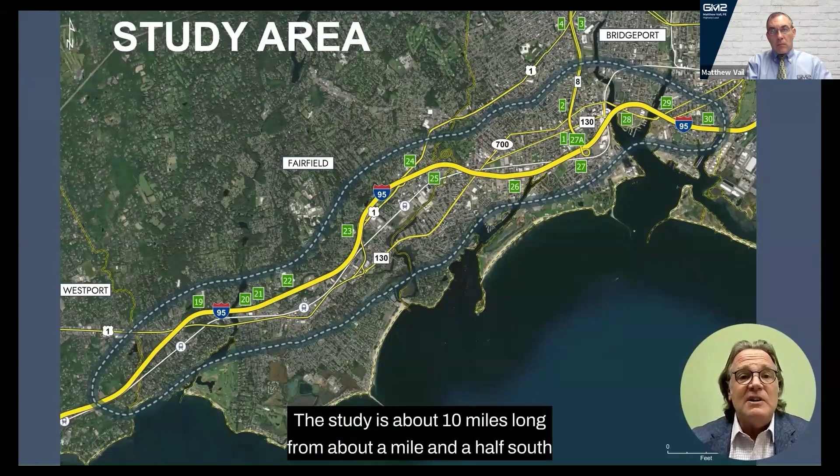The study is about 10 miles long, from about 1.5 miles south of exit 19 near Sasco Creek Road to just north of exit 30 near the Bridgeport-Stratford city lines. It also includes adjacent state roads such as routes 1, 8, and 130.

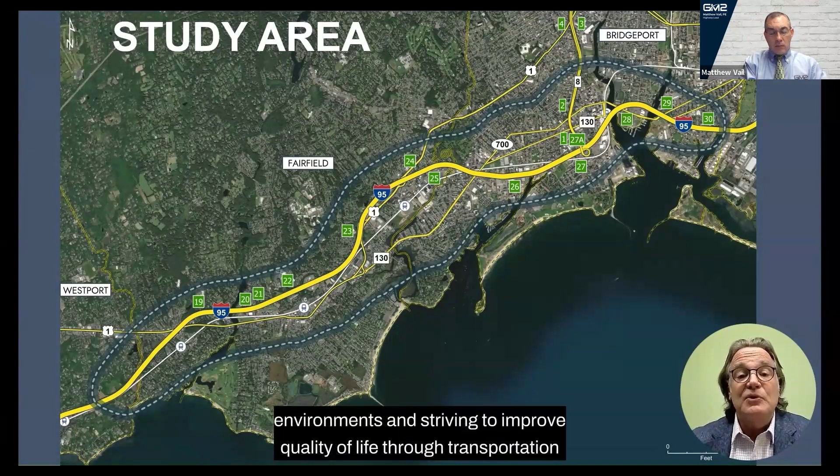The intent is to look at the transportation issues in the corridor along with sensitive resources and recommend solutions to address the transportation needs while reducing impacts to the human and natural environments and striving to improve quality of life through transportation solutions for all community members within the corridor.

Keep in mind, this is just a study as of now, and no specific project has been identified. The I-95 mobility study is called a PEL study. PEL stands for Planning and Environment Linkages and is a federal highways term for this very high-level study. A PEL study is intended to link the bigger regional planning efforts to more project-specific environmental studies.

A PEL is reliant upon input from the community. The linking of this community input with the larger regional planning and environmental issues creates better real-world collaborative solutions to transportation needs in the area. At the end of the PEL, ConnDOT will produce a comprehensive report that summarizes the PEL and provides recommended solutions for the transportation needs in the corridor.

The PEL study process follows these steps. There's an identification of transportation issues and a prioritization of those issues. Next, along with community input, a vision is developed for implementing improvements in the study area. Areas of environmental and community concern are highlighted and studied at a very broad level to understand constraints that need to be considered in developing solutions to the identified transportation issues.

After the development of real-world solutions and any associated mitigative strategies, a roadmap is developed to dovetail the PEL information into a more detailed project-level environmental study. Only then can projects be identified and recommended for implementation, both short and long-term.

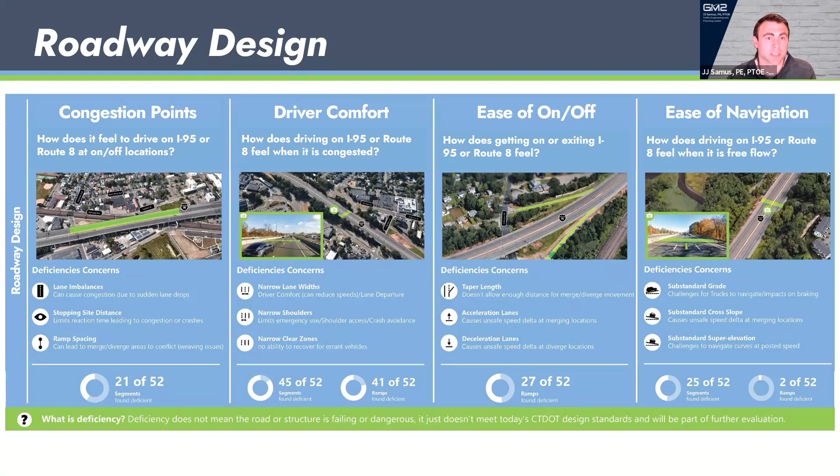We look at these through the lens of what is deemed a design standard. So when something doesn't meet today's standards, we deem it deficient. It's really important to identify that deficient does not mean unsafe—it just means it's something we need to examine. A lot of these facilities are very old, and part of the study is identifying those locations and, through our alternatives development, bringing them up to standards to function correctly today. We can see there are several areas of improvement along the main line that we can fix from a design perspective. Go ahead and go to the next slide.

And we look at structures in general. The bridges and structures along the corridor meet those standards developed and provided by CTDOT, with a few bridges needing to be reviewed, but these will all be part of what we're trying to address during this project.

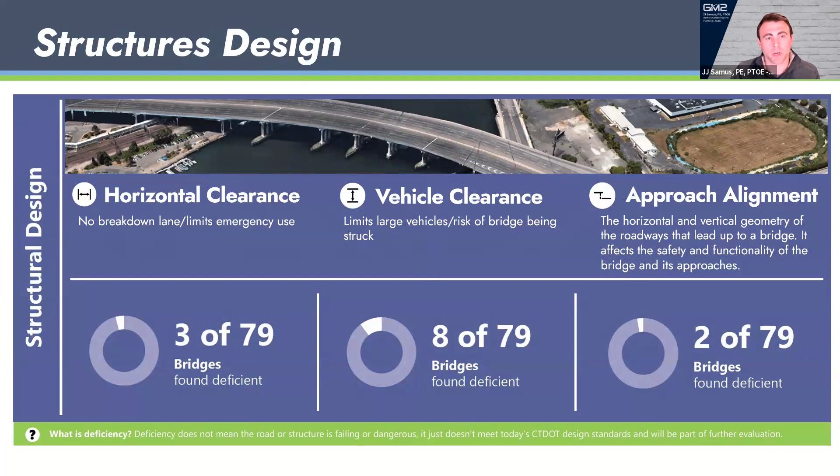Raul, did you want to take over for a sec? Is there anybody we need to address? Right now, I don't see any questions in the Q&A, and no one has raised their hand yet. So I think we can continue on, and we have a couple more breaks for questions. If you do have another question as we finish up the presentation, we'll also end with a Q&A session if you want to hang out and ask some questions to the project team. But nothing right now, JJ, so I think we can continue on with the presentation.

Okay, let's go ahead and go to the next one. So what we're going to talk about now is traffic conditions. That is a challenging topic to try to cover because everybody drives in traffic, but what actually leads to traffic breaking down and slowing down is really hard to describe. It could be a lot of things.

Traditionally, it can be capacity. So it's easy to assume that by adding lanes we could fix a congestion problem. But there's a lot of different things and a lot of different perspectives to that topic.

Weaving, which is where you have a ramp get on and then a lane continue on and then immediately get off, can cause friction along a main line, which causes everybody to slow down. A decel lane that might not be long enough could cause people to brake while they're still traveling along the main line, which could cause backups.

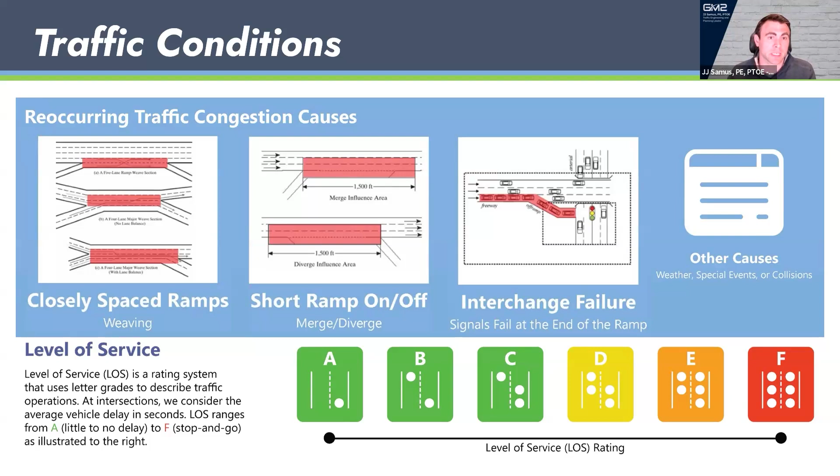Go ahead and go to the next slide. We also look at things like origins and destinations, where you're coming from and where you're going to. These are incredibly important, and we have some of that illustrated here in the AM and PM, which we'll see in a few slides, for northbound and southbound Route 8 and 95. These are incredibly important because they really determine how people use the facility and can help us identify how to possibly improve some conditions on the main line, as well as know that our analysis is correct.

So this is the AM southbound Route 8 and 95 trips. Go ahead and go to the next slide. And these are the northbound Route 8 and 95 trips.

Now, something also to consider along with this is we want to quantify how many people are passing through a study area and how many people are staying local to a study area. What I mean by that is, if somebody's traveling along I-95 and passes through Fairfield and Bridgeport, their solutions, if they're a large percentage of the users, may be different than somebody who's wanting to get on in Bridgeport and get back off in Bridgeport. So we want to consider all those aspects.

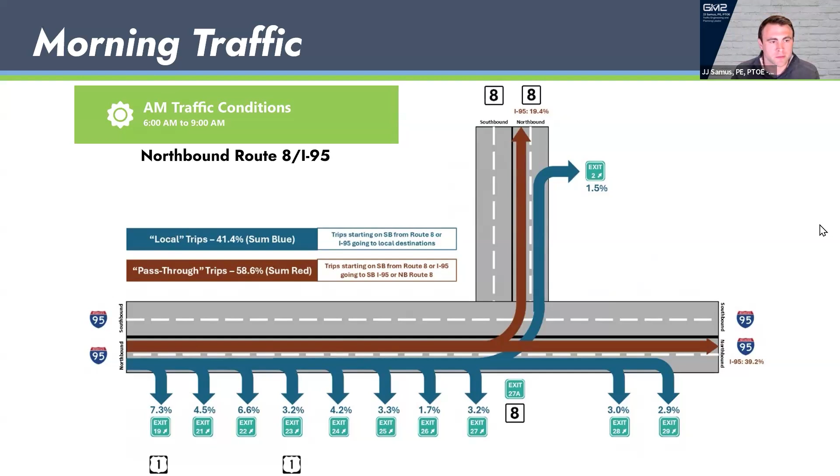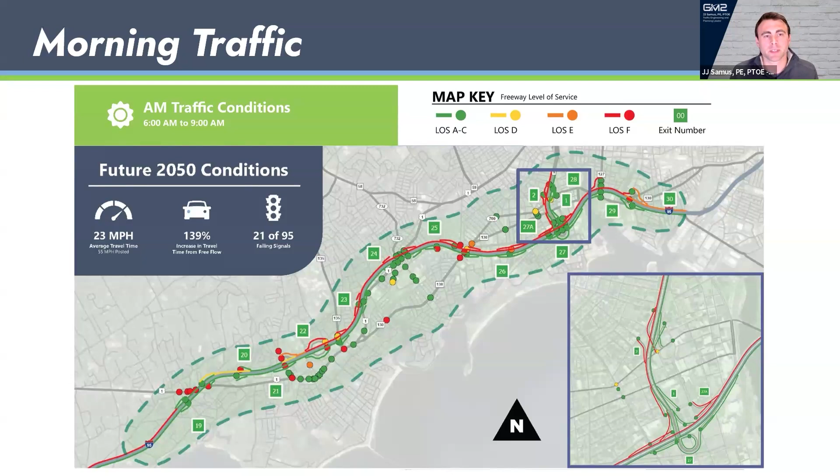We conducted a forecast to examine what it will look like in the future under a no-build condition, meaning no improvements are made. What you can see is if we do nothing, those travel speeds drop even further to 23 miles an hour, an average throughout the study area. The travel time is increased by 139% over what the free flow speed would be. So obviously, if nothing is done, things will get much worse.

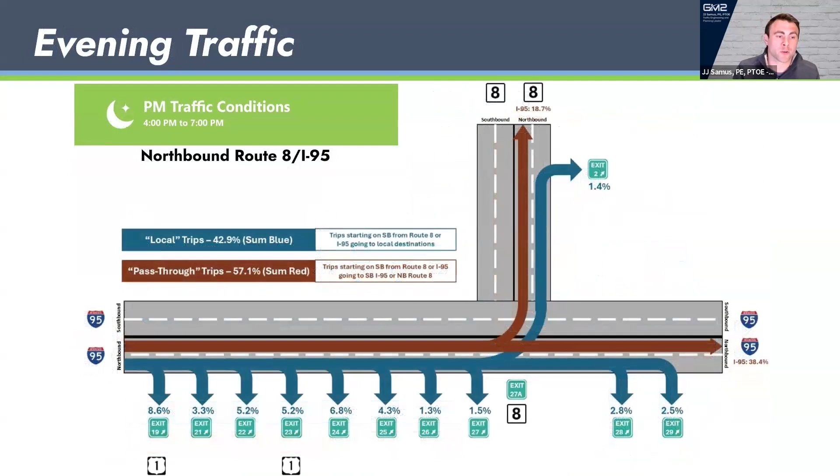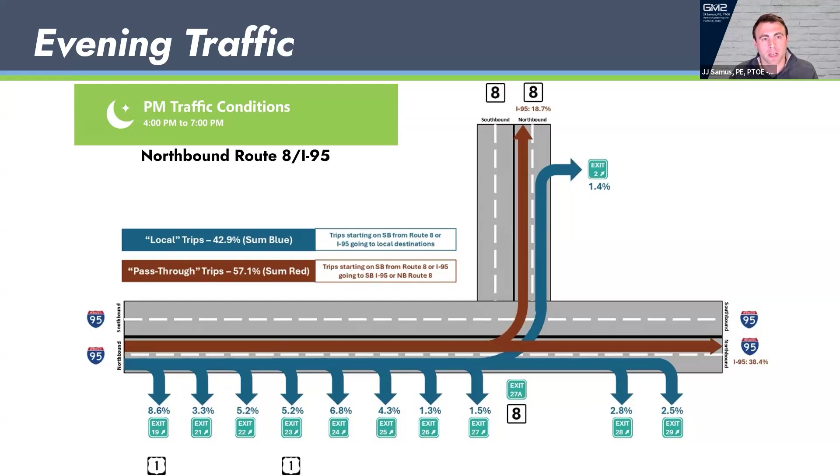Now we can go to the next slide, which is just the PM. Again, we summarize this information to ensure we have a good basis and understanding of how traffic is flowing in the sub area, in both the southbound and northbound conditions. This is to ensure we really understand travel behaviors so we can help solve not only spot problems like a broken interchange or ramp, but rather help people better traverse the corridor.

If we go to the no-build future condition, we can see things get much, much worse. Now southbound is breaking down during the PM condition, extending back from exit 22 again, as we saw in the AM. Route 8 is really starting to light up red, and things get much worse, with end-to-end travel times increasing to 150% of typical free flow conditions.

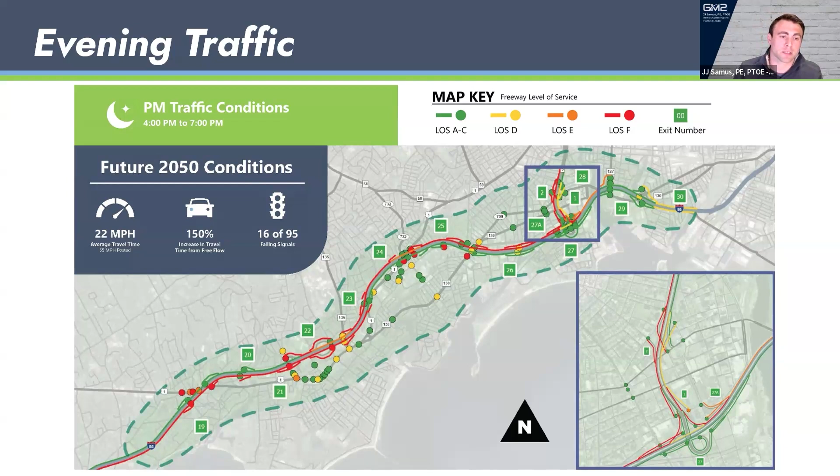All this is important because congestion leads to a lot of different challenges along the corridor, including safety. Of the 5,452 crashes, the top three were front-to-rear, angle, and sideswipe within the study area. These are all heavily driven and influenced by congestion. So if we could solve the congestion problem out here, we can really get to more root causes of some of the other safety patterns we see, and help mitigate those challenges within the study area.

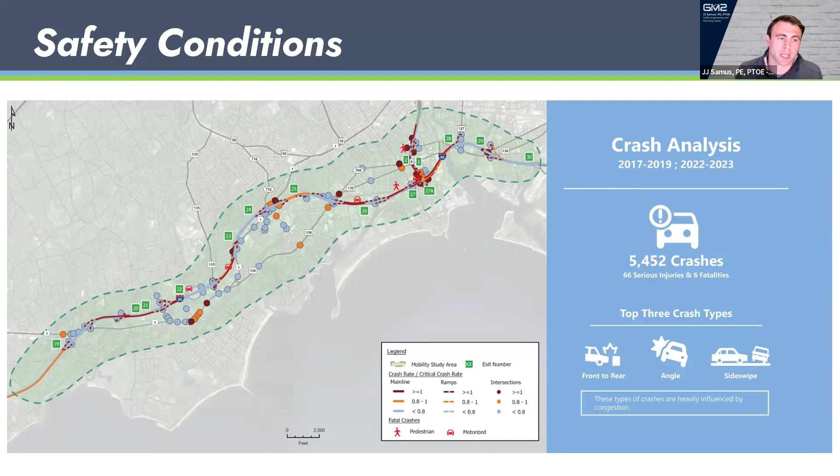Some key takeaways from our analysis: a lot of these congestion issues and challenges along the corridor are driven by closely spaced interchanges, where you have a lot of ramps close to one another. You have really short on and off ramps, which doesn't give you enough time to slow down or speed up. And like we identified, those signals at the bottom of the interchanges are often failing in that E and F range, which causes them to either back up onto the interstate or make it hard to even get on. So there's a lot we need to take a look at there.

In the AM, the southbound is really heavily congested and will only get worse in the future. Then PM gets worse in almost every direction as you go into that no-build horizon. The safety takeaway is that congestion is really a main driver behind the predominant number of crashes along the corridor. We really want to focus on this when doing our alternative solutions, to help mitigate those crashes and provide safety enhancements along the corridor.

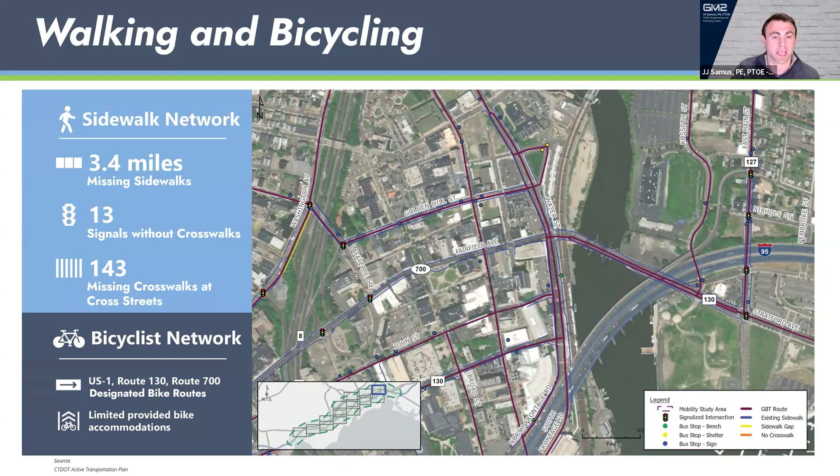We also understand there's so much more to this other than just cars. We understand there's a larger need in the entire study area to assess mobility from a variety of perspectives. So we've also gone out and done a robust analysis of sidewalk and crosswalk gaps within the study area. We found there was 3.4 miles of missing sidewalk, 13 signals without crosswalks, and 143 missing crosswalks along cross streets. These are things we really want to make part of our solutions, to talk about how we can enhance bicycle mobility, walkability, and other things. To expand on why these gaps are important and the demand, I'm going to hand it over to Mike to speak more about that analysis.

Thanks, JJ. We know this is a mobility study, and the highway is a big component of mobility, but it's also a highway that goes through a heavily urbanized area. So it needs to accommodate people who are walking, bicycling, and taking transit. We're doing an inventory to understand really where those popular destinations are to walk and bike.

I think the message of this slide is really schools, parks, and train stations for the most part. We have a lot of pedestrian activity you'd imagine at Sacred Heart, Fairfield University, University of Bridgeport, but also the beach and Seaside Park, Beardsley Park, as well as the Fairfield and Black Rock metro stations. These are the top 6, but we know that every bus stop has a component of walking. That's really important to understand, making sure that walking is safe from when you get on and off the bus to wherever your destination is.

Similarly, we looked at data that showed where people are bicycling. A lot of that bicycle activity is really focused in the Bridgeport area. You can see a lot of destinations in downtown, the Black Rock neighborhood, parks, and then popular routes along the Post Road and Fairfield Avenue. So we're going to be looking at some of those roads to make sure bicycling amenities are in place so people can bike safely.

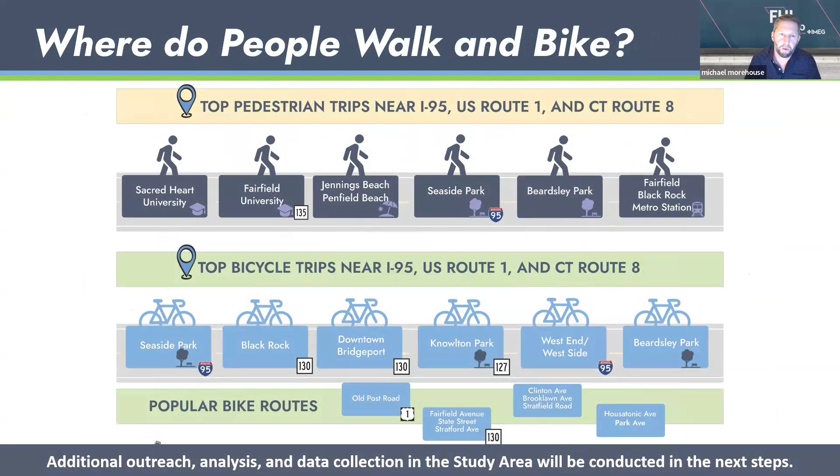We also took a look at short car trips, because short car trips are trips that could potentially be converted to bike and walk trips. Especially as the region's road systems get more and more congested over time, you really need to make sure there are safe alternatives to driving. Our study corridor, in the lower left-hand corner of the screen, covers the area right around the highway and the rail line, but we took a more expansive look throughout Fairfield and Bridgeport.

This graphic shows all of those automobile trips that are less than 1 mile in length. The bigger the dot, the more trips started or ended there, and the thicker the arrow, the heavier the trip interactions between those origins and destinations. You can start to see patterns—for example, Sacred Heart University to Trumbull Mall has a lot of very short trips by car. We're going to take a look at the roads in between to see if they have adequate pedestrian and bicycle facilities, because those could be great opportunities to move or encourage people from cars to take different types of trips.

Certainly, there's a lot of interaction from downtown Bridgeport to the various neighborhoods and parks around downtown. So again, we'll look at the full road infrastructure to make sure that people can get around in multiple ways.

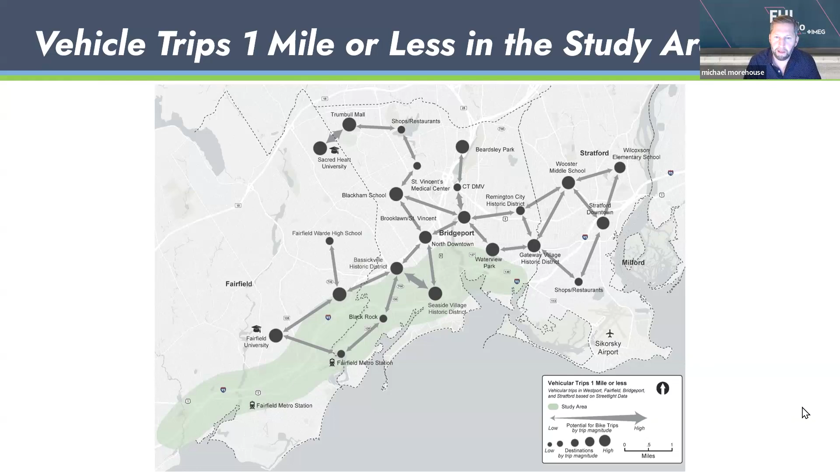And then finally, the public transit system. Bridgeport and Fairfield are situated in one of the nation's, if not the world's, busiest transportation corridors for public transit. The commuter rail system, Metro North, has 4 rail stations within this study area. Ridership took a hit during the COVID years as train service was decreased and people weren't riding, but that's been rebounding since 2022—a 62% increase since then, and it continues to climb.

Similarly, there's intercity rail, the Amtrak service primarily. There's about a dozen trains that go in each direction through Bridgeport on its way to either New York or Boston. So Bridgeport remains a real hub for longer distance train trips, almost 100,000 of those being made each year.

And then buses. Buses serve a really vital, important role here in the transportation system. Greater Bridgeport Transit operates service with a hub in Bridgeport, and the Coastal Link, which runs along Route 1, is obviously a very popular route as well. We want to continue to make sure we're enhancing transit bus opportunities throughout the corridor.

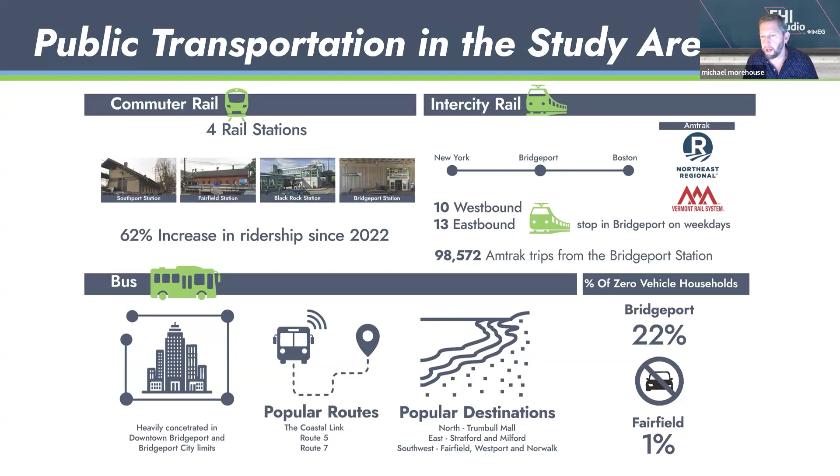One of the things most interesting on this graphic is the lower right-hand corner—the percentage of households that don't own an automobile. In Bridgeport, about 22% of households don't even have an automobile, whereas in Fairfield it's 1%. That shows you the difference between the city and suburban locations in Fairfield. Transit is important not just for everybody to have alternatives to driving, but it's absolutely essential for those who don't own an automobile. That's why we need to pay particular attention to making sure we're looking at options that promote walking, biking, and public transportation. Thank you.

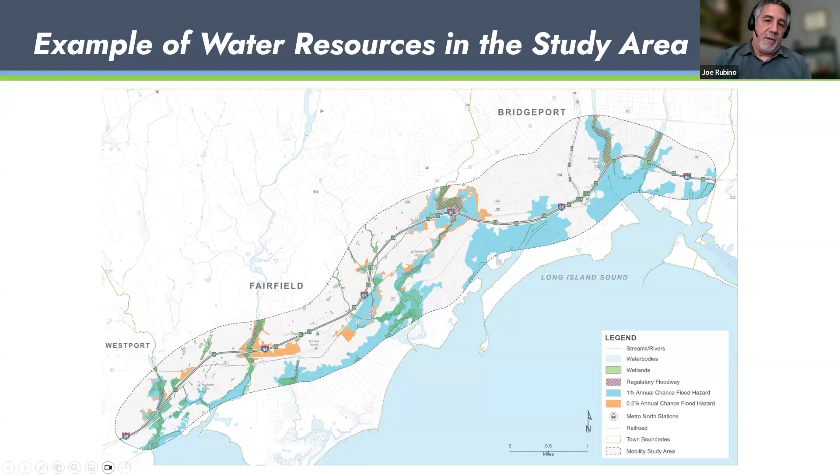So with that, I will turn it over to Rick, who's going to talk a little bit about purpose and need and where we go from here in terms of the study. Thanks, Joe, and kind of tie some of this all together.

As we stated at the beginning, one of the outcomes of a planning and environment linkages study such as this is to understand what the needs are in the corridor, and therefore what the purpose or objectives of the study are, and how we can address the transportation issues. JJ has gone through a lot of the transportation and automobile aspects, and we've heard from Mike about other modes of transportation. We hope to be able to define the needs for all users in the corridor.

We have heard that there's a difference between two communities in the corridor in what percentage of households own vehicles. We've heard how many short trips have been identified, and how different corridors might be able to take cars off the road if other modes of transportation are enhanced. So the PEL is intended to look at these larger planning issues and integrate with them so we don't preclude any one, and maybe enhance these other planning activities as we identify the needs in the project.